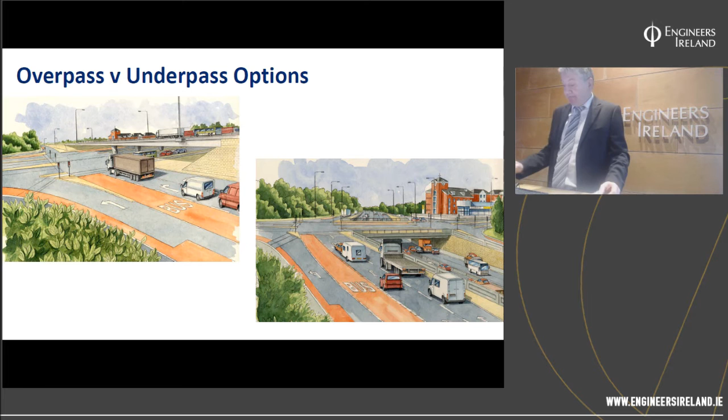At about this time, in mid-2007, Kildare County became the authority on the scheme under a Section 85 agreement with South Dublin County Council, and Arup were retained to develop the preliminary design and the EIS for the project.

This drawing shows the final design layout of the Newlands Cross Junction. The N7 is taken over the Belgard and Fonthill roads on the new flyover, and the main line, comprising 3 lanes in each direction, is free flow through the junction. Now, all previous turning movements at the junction have been retained and also had to be retained during the construction period, and this proved quite a challenge to the construction of the junction.

Throughout the scheme, all previous pedestrian and cycle routes have also been retained and improved, and there is full controlled pedestrian access through the junction. It was designed to minimise the amount of permanent land take. As the northern boundary was quite extensively developed with residential and commercial properties, all of the land take was confined to the southern side of the N7. And in order to limit the amount of land take to the south, the scheme was brought as tight as possible to the northern boundary.

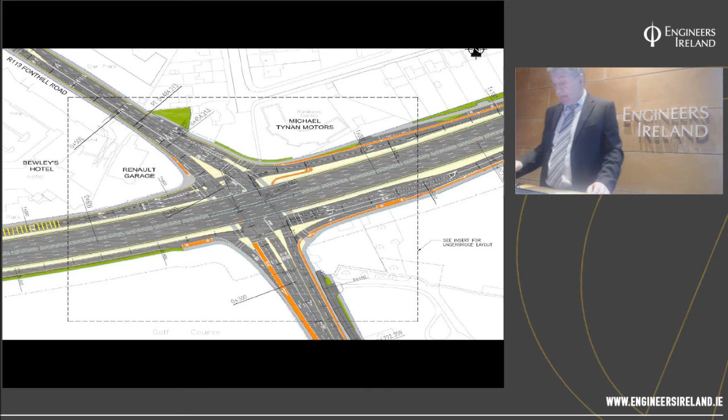Now, just briefly to touch on the project appraisal. Arup undertook the initial traffic modelling and appraisal, and this was later updated by RPS. An area-wide traffic model was developed from the DTO's transportation model. The DTO model incorporated all of the committed transport proposals in the Greater Dublin area, as well as estimates of population growth for the region based on the Dublin area development plans. A local traffic model was then developed specifically for the Newlands analysis from the data on traffic movements and network changes that were extracted from the DTO model.

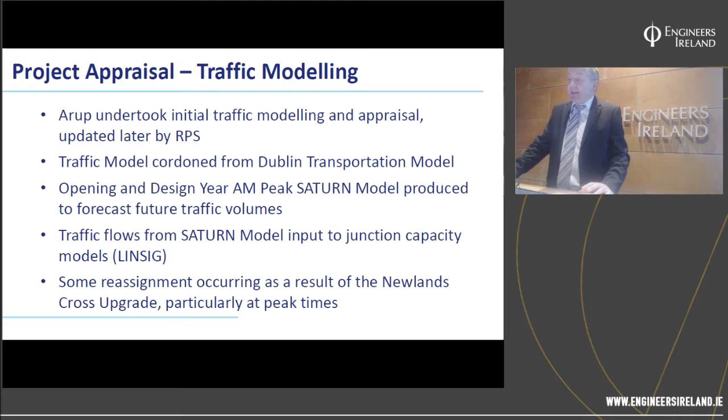Opening and design year AM peak SATURN models were then produced to forecast future traffic volumes with and without the proposed junction upgrade. And then traffic flows from the SATURN models were used as inputs to junction capacity models, which allowed for detailed consideration of the junction layout and also for the signal control operation. The traffic model showed that there would be some rerouting to the improved N7 following the junction upgrade, particularly at the peak periods.

The cost-benefit analysis for the Newlands Cross upgrade scheme was carried out using the traffic data from the traffic modelling report and from detailed cost estimates for each element of the project. The results of the cost-benefit analysis are very encouraging: a benefit-to-cost ratio of 4.95 for the low traffic growth scenario, and as high as 11.7 for the high growth scenario. That shows that significant economic travel benefits were shown to accrue from the proposed scheme.

By far the largest element of the benefits is the value of time savings resulting from the reduction in traffic congestion on the network. So improved journey times will benefit both businesses and commuters living and working in the southwest of Dublin, and will facilitate the more efficient movement of people and goods between the Greater Dublin area and Limerick and Cork.

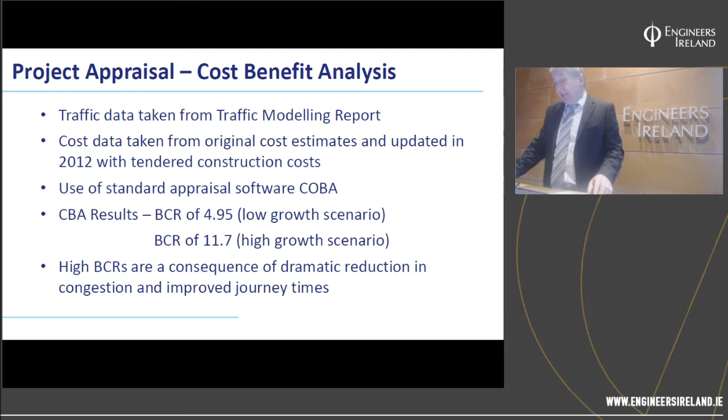It was recognised at a very early stage that the successful delivery of the project would be very much dependent on the success of the traffic management arrangements that were to be put in place during the construction phase. And any disruption to the existing traffic flows would have to be kept to an absolute minimum. Now, extensive design was carried out by Arup at the time to develop a logical construction sequence and associated traffic management arrangements.

The possible traffic management arrangements were tested out using microsimulation software to determine whether queue lengths and delay times were going to be acceptable. This exercise proved extremely valuable, as it became apparent that in order to achieve acceptable traffic through the work site, additional lands would have to be acquired from the southern side of the N7 on a temporary basis to allow for the construction of temporary traffic lanes.

So we caught this in time, and the CPO drawings were adjusted accordingly prior to publication. So it's a testament to the early work that was done in developing a robust traffic management plan. The contractor subsequently implemented these same traffic management arrangements by and large.

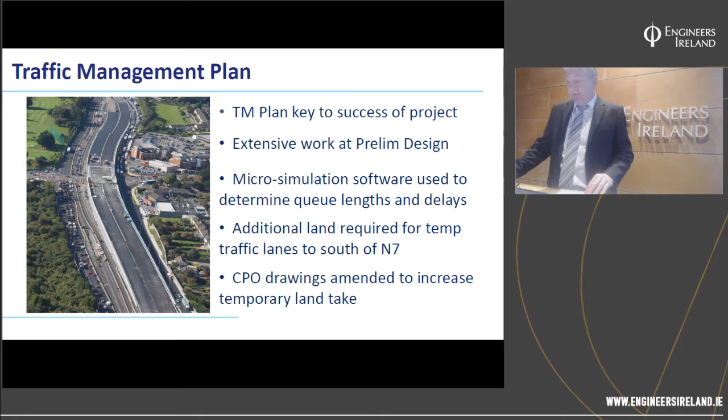In order then to de-risk the project, it was decided to carry out advanced works ahead of the main construction contract. The Cork to Dublin gas transmission main ran along the eastbound verge of the old N7, and it was considered too great a risk to the project to have the diversion of this strategic gas main left to be carried out during the main construction contract. So a separate contract was entered into with Bord Gáis Networks to divert this gas main into the greenfield lands that were acquired to the south of the N7.

There was also a utilities investigation contract put out to identify the nature and location of the extensive services within the site of the proposed upgrade works. Archaeological testing of the strip of acquired land to the south of the N7 was undertaken in advance of the gas main diversion, and nothing of significance was encountered there. And due to the urban nature of the site, no further archaeological works were required.

So just briefly to go through the history of the scheme. Kildare County Council published the CPO and EIS for the scheme in late 2007, approximately 2 years after the project commencement. So we managed to get to publication in 2 years, which is good going. The scheme was approved by An Bord Pleanála with conditions in 2008. The advanced works were undertaken in 2008 and 2009, as I said, to divert that Dublin to Cork gas transmission main. And then a D&B tender competition commenced in mid-2008, almost as soon as we got approval from An Bord Pleanála for the scheme.

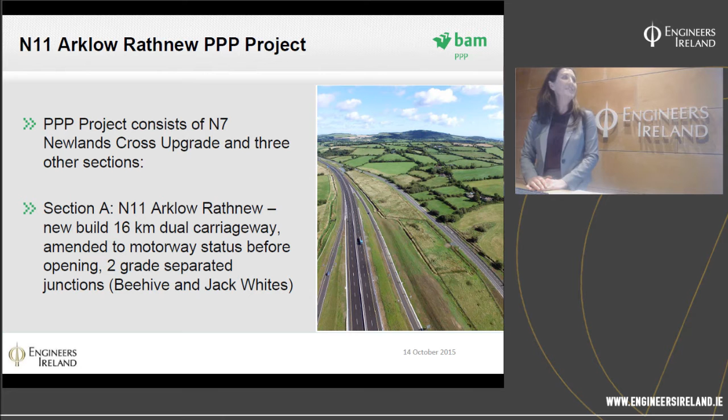Section B of the project then was upgrade works to a section of existing motorway heading south from the end of the site to about a kilometre above Clock Roundabout. The upgrade works were mainly drainage rehabilitation, ducting, emergency roadside telephones, and we also started operations and maintenance on that from the beginning of the project.

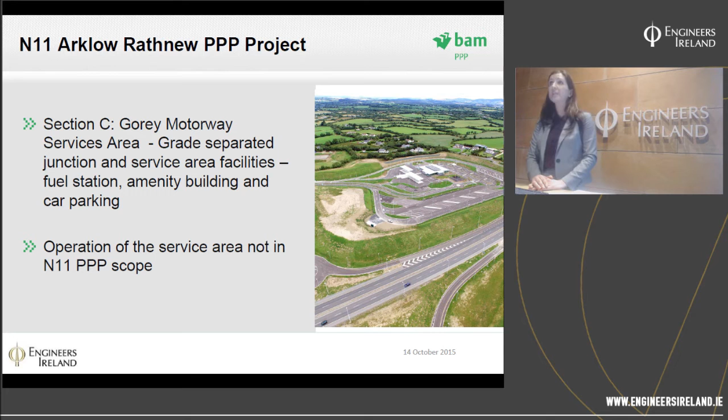Section C then is the Gorey Motorway Services area, grade separated junction. The services area is an amenity building, fuel station and car parking, and the operation of the services area is outwith the jurisdiction of our PPP contract, but we do maintain the grade separated junction and approach roads. And Section D then, which I won't steal anybody's thunder and speak any more about, coming on to that.

So just in case you think that you've wandered into the wrong presentation or I'm in the wrong presentation, the reason that all the elements of the PPP project are so important is that, as Kieran said, one of the concepts of public-private partnerships is that until the asset is available for use, the private partner doesn't get paid by the government or by the authority. So now that all elements are available for use, payment to PPP Co has commenced.

As Kieran has said, it's an availability payment mechanism. That means that we looked at all our costs at tender stage and worked out what availability payment would be required to the public-private partnership company, and that was our tender. The other payment mechanism, as Kieran has already said, is toll roads, where the PPP company collects toll revenue. And the N11 is the second non-toll road project after the M50. The M50 PPP scheme doesn't include the link.

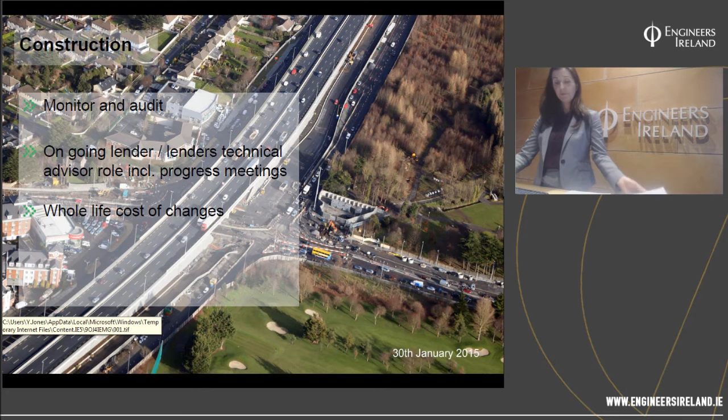Newlands Cross is slightly different to the N11 Arklow Rathnew in that we have a limited operations and maintenance scope at Newlands. We're not doing, for example, winter maintenance. We're not doing any of the, I suppose, regular or frequent elements. We still have the life cycle or major or capital maintenance obligation with Newlands Cross. And as I say, we operate and maintain for 25 years, and the NRA have handback requirements with regard to residual life, which we have to comply with.

Okay, so that's my element. I'll hand over to Darren now. Okay, thank you very much.

My name is Darren Devan. I'm a contracts manager with BAM, and I was responsible for the design and construction stage of the Newlands Cross upgrade scheme. So I will now describe some of the design and construction aspects of the scheme, including the scope of some of the challenges that we encountered during the design and construction stage and how we overcame them. I will describe the traffic management arrangements required to facilitate the construction of the flyover.

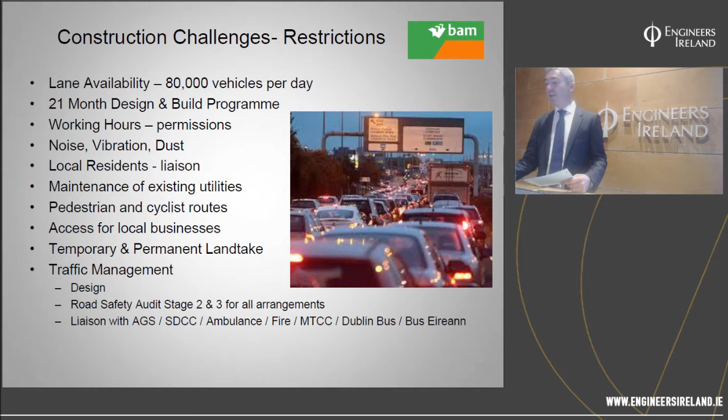So I'll describe in a little bit more detail the traffic management arrangements that we implemented during the construction of the interchange of the flyover. And the works were constructed with 4 major traffic management phases. We had to be cognizant of the requirement to maintain all the required traffic lanes on the N7 during the works, in order to ensure that the 80,000 vehicles per day passing through the works did so with minimal disruption.

I suppose to that end we monitored the travel times that it took vehicles to travel through the junction during the course of the works, and I suppose that dictated certain tweaks or certain changes that we would make to the traffic management arrangements, and particularly the temporary traffic signalling at the junction, to reduce the tailbacks at Newlands Cross as much as possible.

We were required to construct significant temporary diversions while constructing the flyover. All these temporary diversions were designed to the NRA DMRB standards, and include road alignments, drainage, footpaths and road pavements themselves.

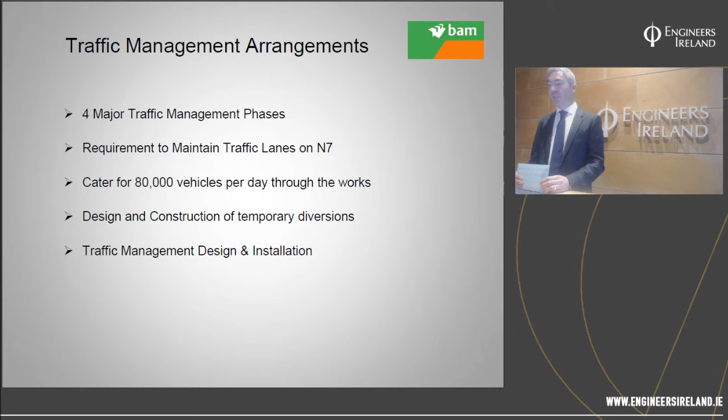So the images I'm going to show you, a number of slides, were generated from a combination of aerial photography and the actual temporary and permanent works design drawings. So phase 1 of the traffic management shows the existing N7 with a signalised junction at Newlands Cross. The construction works involved in phase 1 included the initial service diversions and the construction of the temporary diversionary roads, which you'll see on the right hand side there.

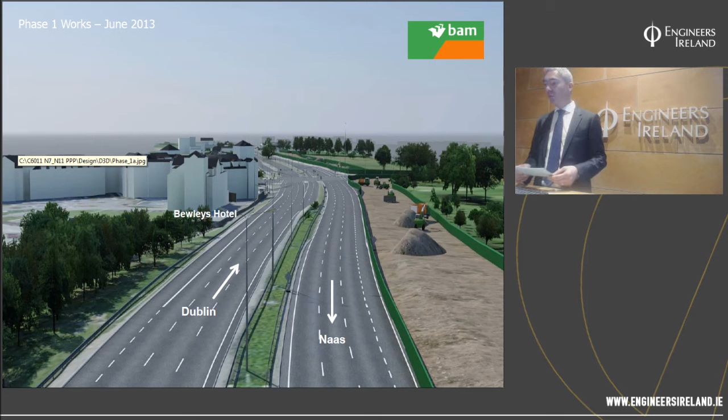So this took us to the end of January 2014, when the temporary road construction was completed and the N7 traffic was diverted onto the temporary diversionary route. So here we can see the N7, the inbound and outbound traffic lanes. So everything effectively was shifted to the south of the site, and this allowed for construction of the flyover approach embankments and indeed the permanent inbound slip lanes to be carried out.

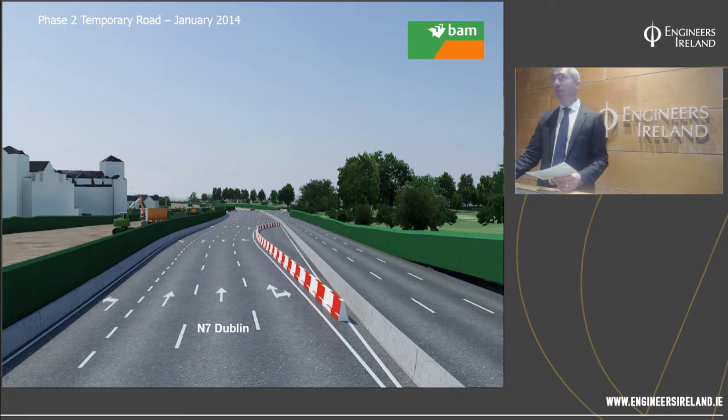Again, this just shows a view looking inbound or citybound on the approach to the junction, and you'll see there was the requirement at the junction for 3 straight ahead lanes, a left turning lane for Fonthill Road, and 2 right turning lanes for Belgard Road. So I think at the junction, the inbound carriageway took up almost 20 metres in width, and the outbound carriageway took up just under 10 metres. So a lot of space required to facilitate the lanes on the N7.

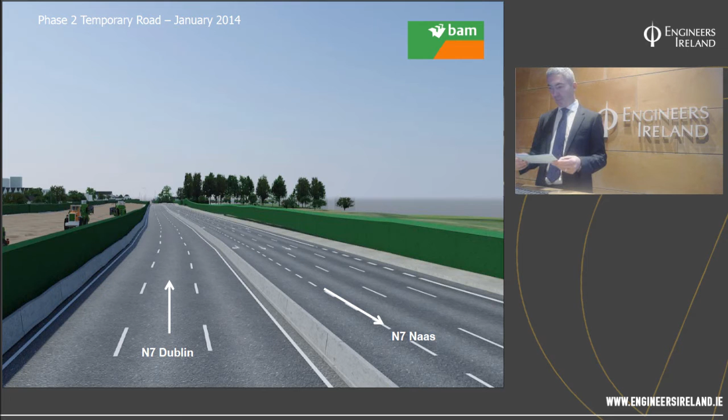This slide again shows the view looking towards the city. You can see the inbound and outbound carriageways.

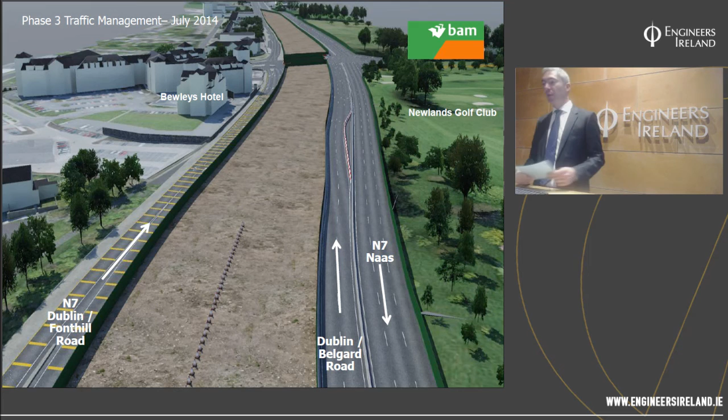So in July 2014, Phase 3 was implemented. At this stage, we had the permanent inbound slip lanes constructed. You'll see them on the left-hand side, and flyover embankment construction was well progressed at this stage. During this phase, the N7 outbound lanes remained unchanged. However, the inbound traffic was split from a point out near Boot Road, with 2 traffic lanes running inbound to the left-hand side of the flyover, and we had 1 city-bound lane and 2 right-turning lanes for Belgard running on the south side of the flyover. So this is probably the most intricate layout used during the construction of the flyover.

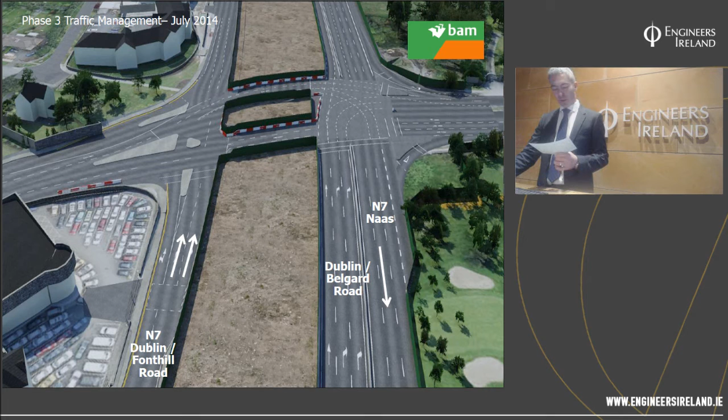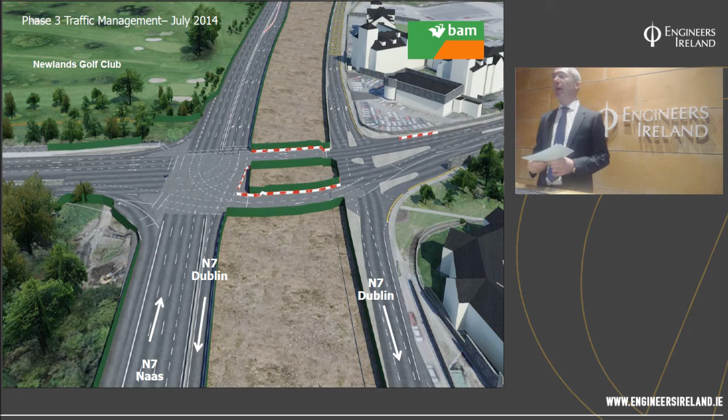Again, this view shows a shot closer to the junction, so you'll see the layout. Outbound remained unchanged, and inbound was split to south and north of the flyover. This view then shows the layout in Phase 3, looking in the opposite direction. And so the reason why this phase was required was to allow us to complete the embankment construction on the western side of the junction, and to complete the centre pier construction for the bridge structure.

Here we can see the Phase 3 layout on the approach to the junction from the Naas side. This is down one side of the embankment. You see the 1 straight ahead lane for the city, and the 2 right turning lanes for Belgard Road. This view then shows where the temporary roads tied into the existing N7 on the approach to the M50 Red Cow interchange.

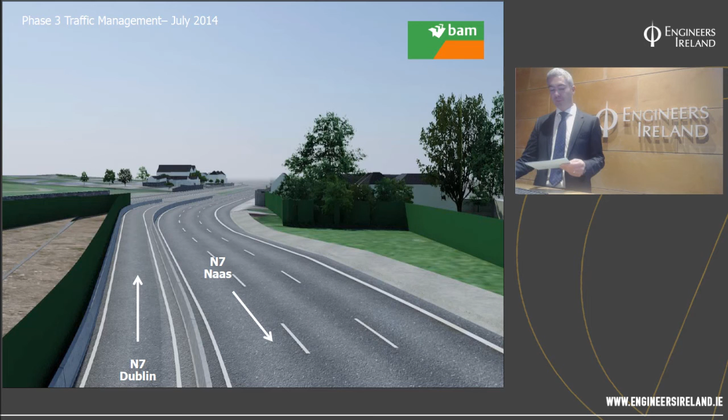So then Phase 4 was carried out from November 2014. At this stage, the N7 traffic had been diverted up onto the new flyover, and this allowed us to complete the road realignment works to Belgard and Fonthill Road and the permanent outbound slip lanes, and during the phase we also carried out all the reinstatement works, removal of the temporary diversions that were used during Phase 2 and 3.

So some of the public relations aspects to the scheme included a feature hoarding, dedicated website and telephone line, quarterly newsletters which were distributed to local residents, schools and libraries.

A public relations officer was appointed from the outset, and we also had a traffic management liaison group which included representatives from the authority, PPP company, contractor, local authority, emergency services and bus companies. So that group convened regularly to discuss upcoming traffic management arrangements and to review any issues that arose during the construction stage.

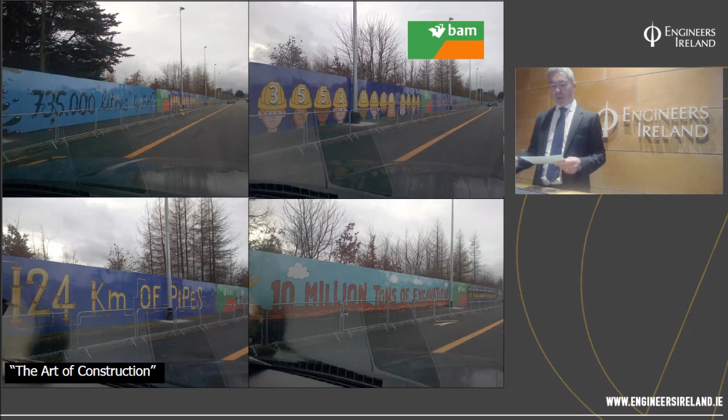So a site hoarding was required to be constructed along the southern boundary of the site, almost 2 kilometres long. We decided to use the hoarding as somewhat of an artistic feature to give members of the public and passing motorists some information about the scheme in a more light-hearted manner than we'd be used to seeing on construction sites.

So we developed the art of construction to provide this information, which was effectively what goes into making Newlands Cross. So we had a bit of fun trying to come up with the statistics, and some people wondered how we came up with the 124 kilometres of pipes, but I assure you there was science behind it somewhere. But it was well received, and we got some very good feedback from members of the public in relation to the hoarding.

Finally, I'm going to talk about some of the value engineering concepts used on the scheme. They were used essentially to secure the programme, to reduce the cost, and to overcome the space constraints on site. So the first one, the reinforced earth embankments. The EIS and the contract required that the reinforced earth embankment walls were clad in limestone. So with almost 6,300 square metres or 1,600 individual panels, we developed a solution to manufacture the wall panels off-site with the stone set into the concrete panels immediately after casting.

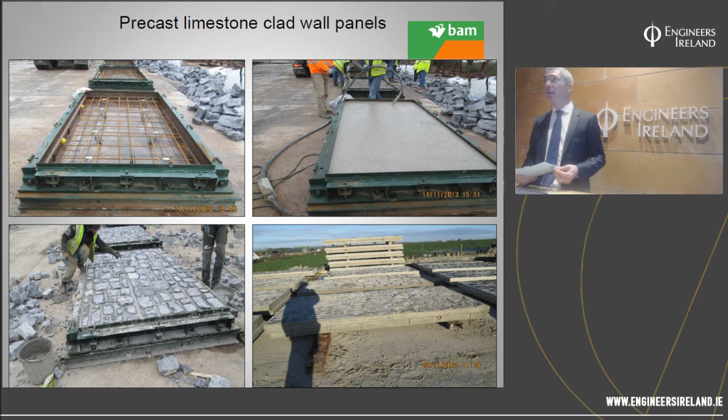So here we can see the finished product with the reinforced earth wall panels. So effectively the construction technique was the same as for any reinforced earth panel, the only difference being that these were significantly heavier than we would usually use, but still easy enough to manage on site.

So as I said, the requirement to future-proof for Metro West meant that a high containment parapet wall was required across the Metro West envelope. The H4A wall sections were constructed in a similar manner to the reinforced earth wall panels. So this part here was constructed in exactly the same manner as the reinforced earth wall panels. Then the standard precast parapet edge beams.

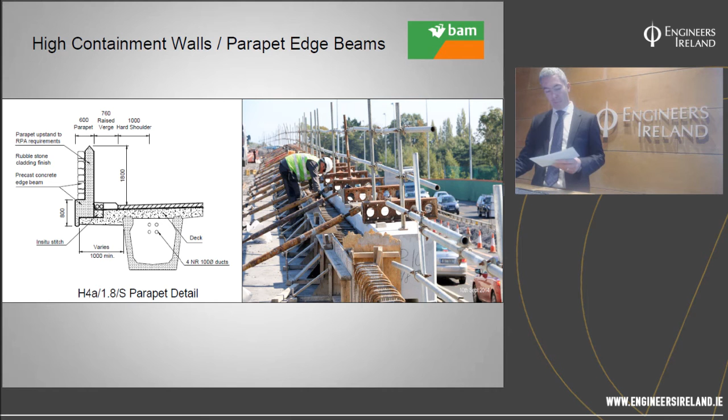These two panels then were connected together in the fabricator's yard, and the entire unit was lifted into place. The units were propped, as you'll see in the arrangement on the photograph, and held in place until they were connected to the deck slab with an in situ concrete stitch. So you'll just see one of those being prepared. And here we can see both the standard parapet edge beams and the high containment walls during installation.

The centre pier crosshead was precast in two sections with an in situ stitch to connect the two pieces. Each unit weighed 52 tonnes and they were craned into position. Now, precasting of these units was considered nearly the only option, because an in situ solution would have required extensive falsework and temporary works right in the middle of the junction, where we effectively didn't have space to maintain all the traffic lanes. Another consideration was trying to protect such falsework from being struck by traffic while we constructed it, which meant that precasting really was the only option.

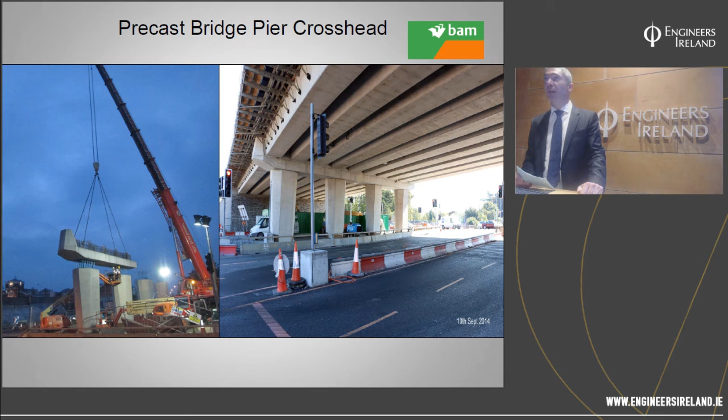So this shows the installation of the beams for the bridge deck. The bridge is a fully integral structure spanning 67.2 metres with two equal 33.6 metre spans, constructed using W13 beams with an in situ reinforced concrete deck slab. The beam installation took place on 3 consecutive nights under lane closures of the N7, so we were able to keep the N7 open, just reduce the lanes down at night time. And the installation was carried out using 2 750-tonne mobile cranes. So that was completed in July 2014.